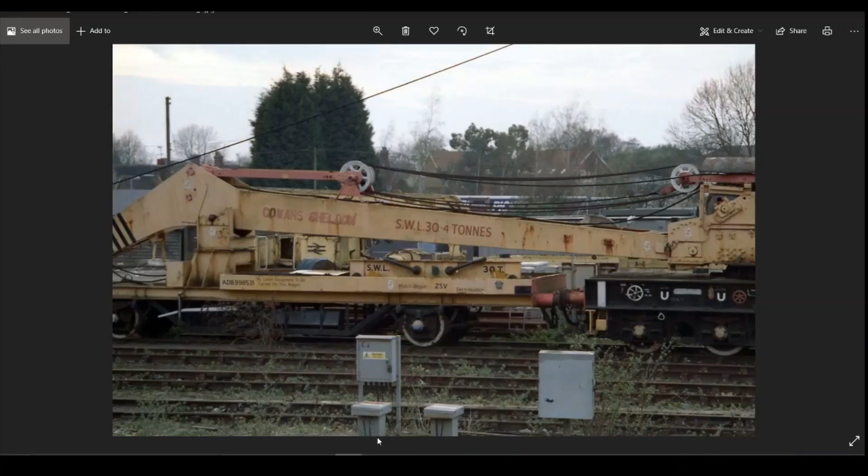What I'm thinking about working on and looking at today is sorting out the stretcher bar for the jib.

If you look at the bar, it's pretty much symmetrical. You've got two D shackles on top, both facing the same direction, and two D shackles on the bottom. I haven't got many pictures that show particularly well inside the hopper. I'm assuming they're probably laying outwards, not inwards, because if they hang towards the inside, the bottom of the shackle would sit underneath the I-beam, whereas if they hang diagonally outwards, the I-beam can sit flush on the floor with the shackles laying down onto the floor on the outside. So it's pretty much symmetrical.

So we're only going to draw half of it and then mirror it across. I'm going to create this as a new body as well, so that if we need to we can print it separately rather than having it print as one part of the underframe. But there's flexibility that if we want to do it as one part, we can just combine them later.

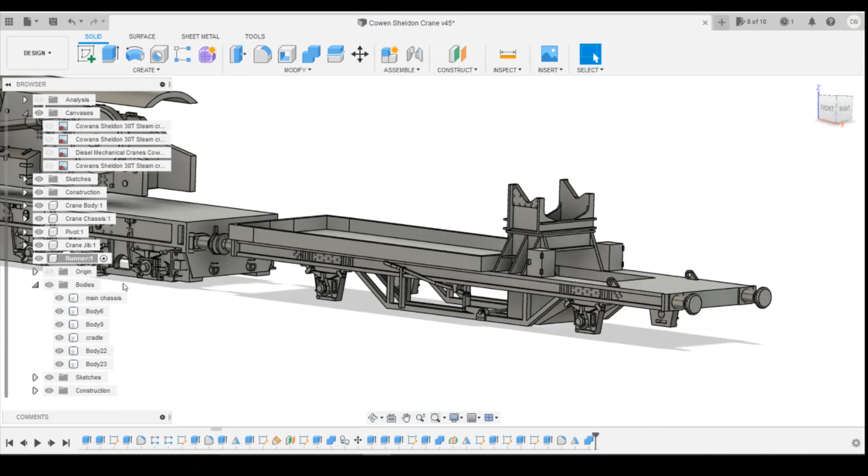Okay, so jumping into Fusion, we'll make sure that radio button is checked for the runner here, and let's have a look on the canvas to see if the I-beam's drawn on. It is.

Okay, so you can see its position. We're going to be drawing it flush to the floor, and symmetrical, using the middle point.

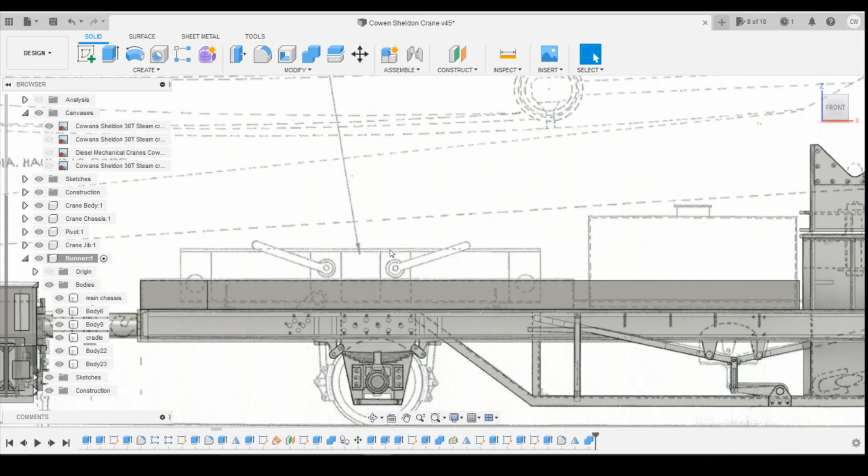If we create a sketch initially and turn the canvas off, that sketch is going to be on... are we going to do it on the bottom surface? Yes, I think I am. I'm going to draw it on that bottom surface initially.

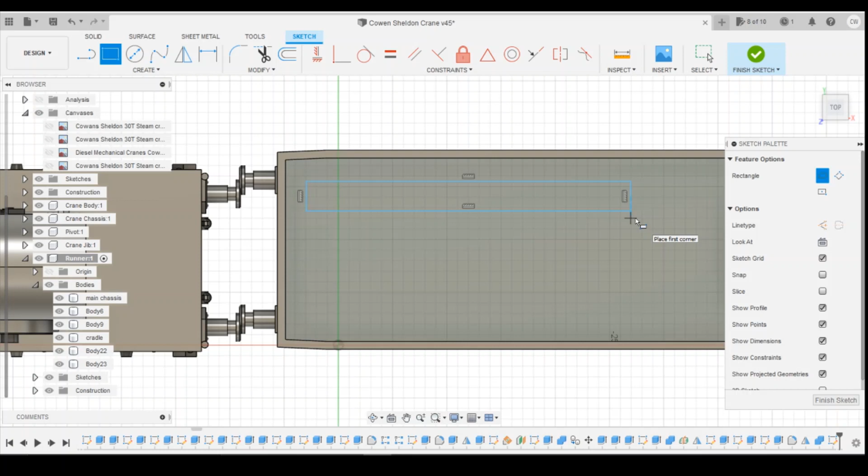I'm just going to draw a rectangle like that, and I'm going to extrude it. In fact, let's just define its position.

Why is this lagging a little bit? So let's call it 30 mil long, and the width will go 3 millimeters.

Position to the edge. Photos - that one's not the greatest. It's probably 1.5 foot or so in.

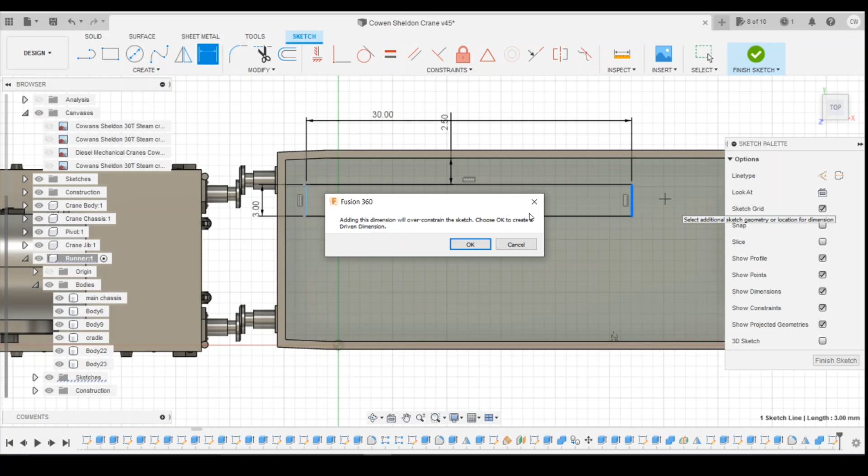So we'll go for 2.5, maybe change that. Width's already defined, and it's the distance from the end of the hopper. Let's just change that to 2 initially.

Okay, if we extrude this upwards, turn the canvas on, we can see whether we're in the right place. No, this end's fine.

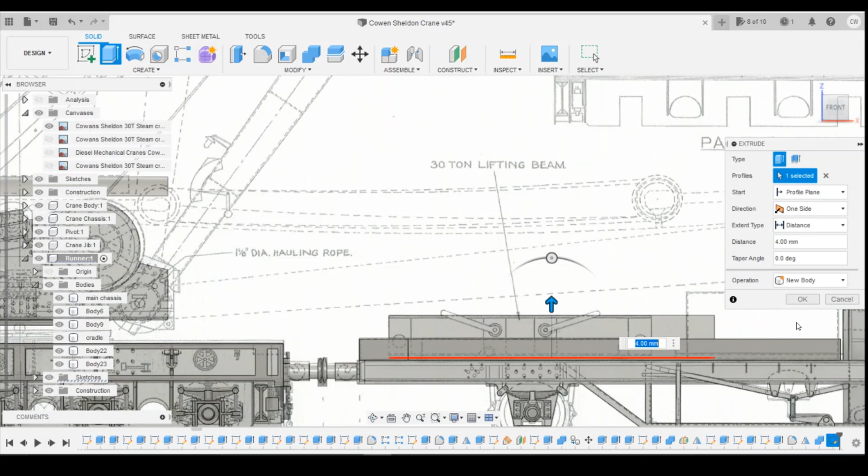Okay, so it's coming up by 4 millimeters, and it's as a new body. So we can see the length we've got. The length is massively wrong here.

So we can edit that sketch onto the bottom rather than top, and we can define this. Let's bring that down to 25 millimeters.

Still a little bit too long. Don't know why I keep going to the bottom, that's annoying. Let's go for 23.5 millimeters.

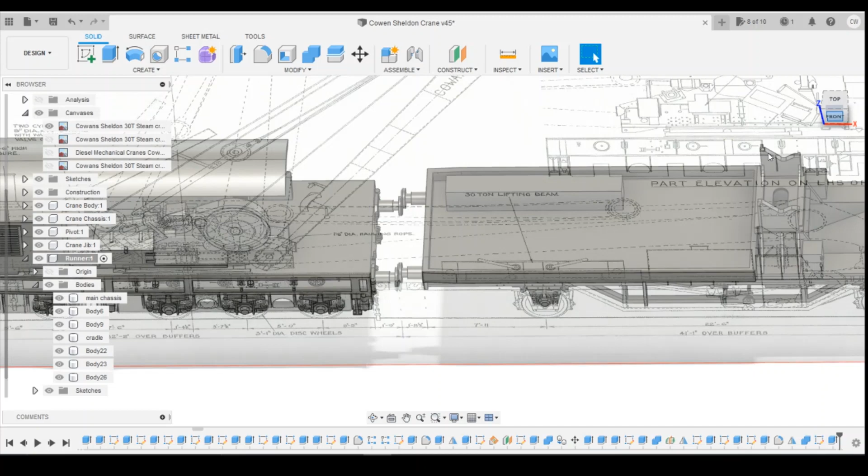Typical, we would probably be in the middle there. I'll just do it like this - 24 millimeters. Okay, so yeah, 24 millimeters is probably going to be about right.

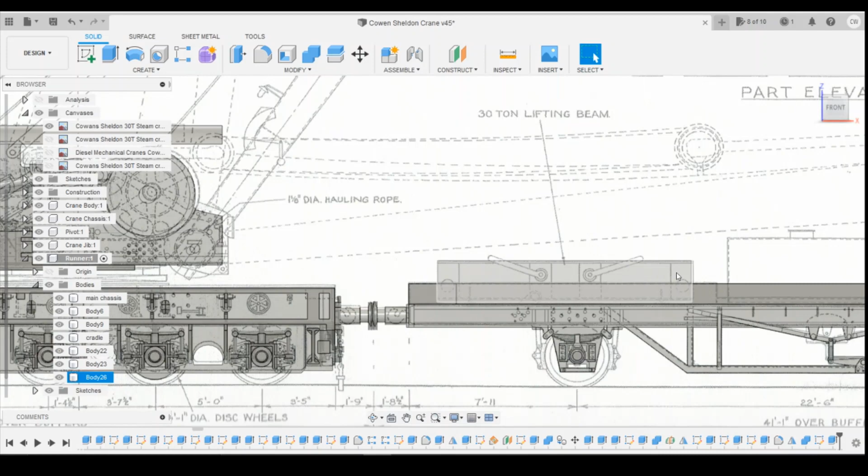Okay, let's have a look on the top surface and see if we've got a sketch from our canvases. Okay, so we can see position-wise where it's supposed to be, but bearing in mind we've made the wagon significantly wider than the sketch.

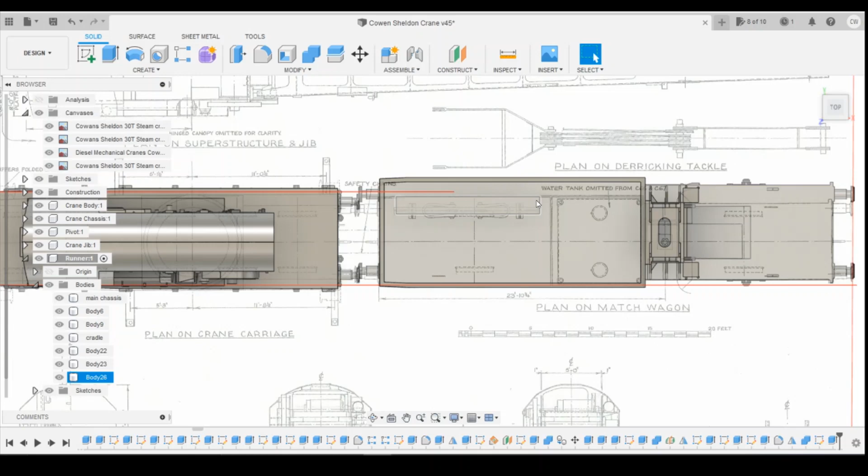Again, all about compromises. So position-wise, I think we're there or thereabouts. Maybe it needs to be a little bit narrower. Yeah, that probably only looks like it's maybe a foot wide.

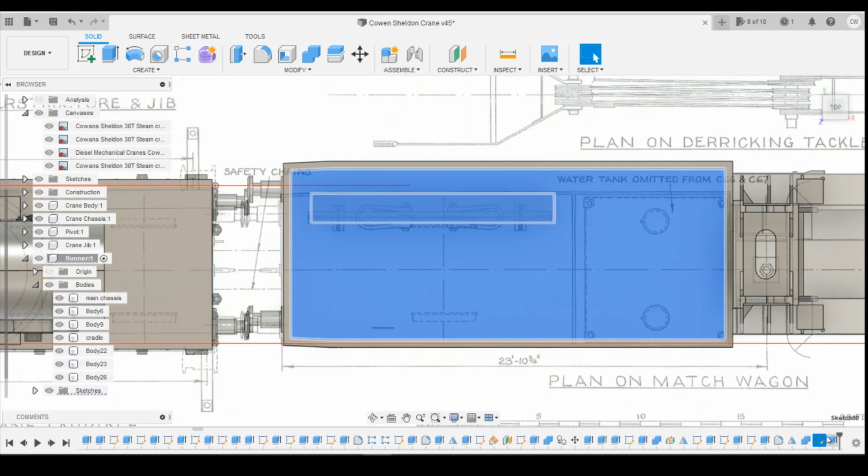So let's have a look at the sketch there. Define the width, that's 3. So let's bring that down to 2 millimeters.

Okay, and now if we bring this down to 12, that's going to give us our mirror point, and we can use the center point then to mirror across. Finish that sketch.

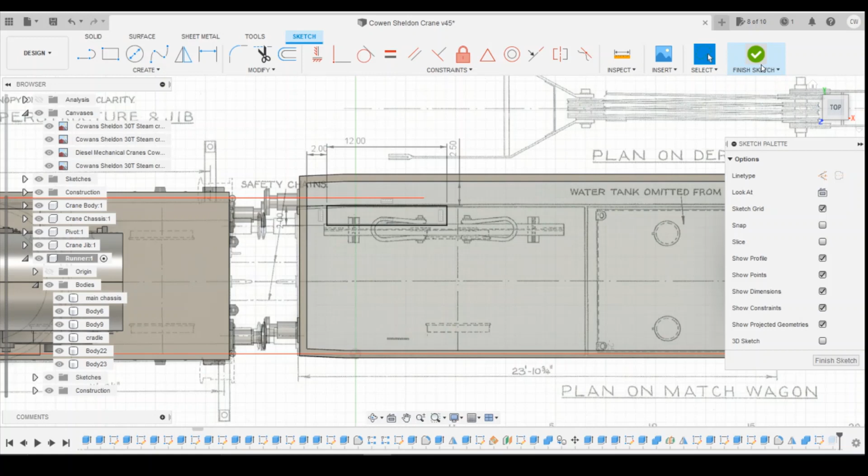Okay, so if we turn all the other bodies off, we'll get the canvases off as well. We're going to turn that into an I-beam now. So if we keep body 26 turned on, let's get rid of the main body chassis. We're going to look at it end-on and draw a sketch on the end here.

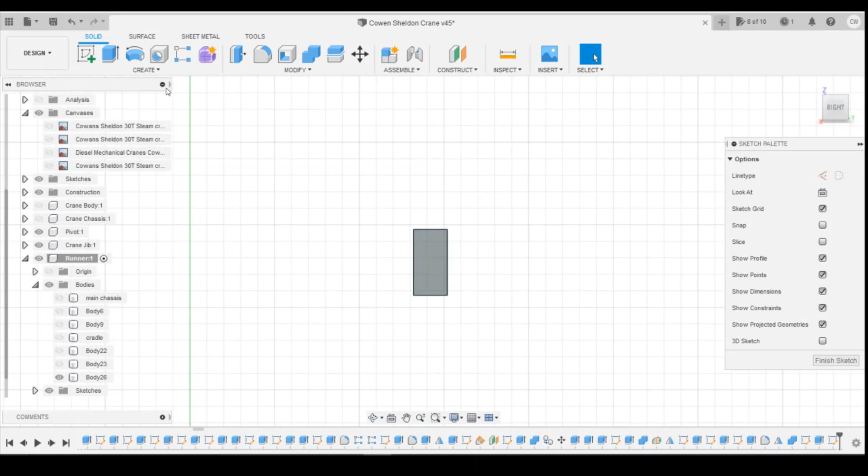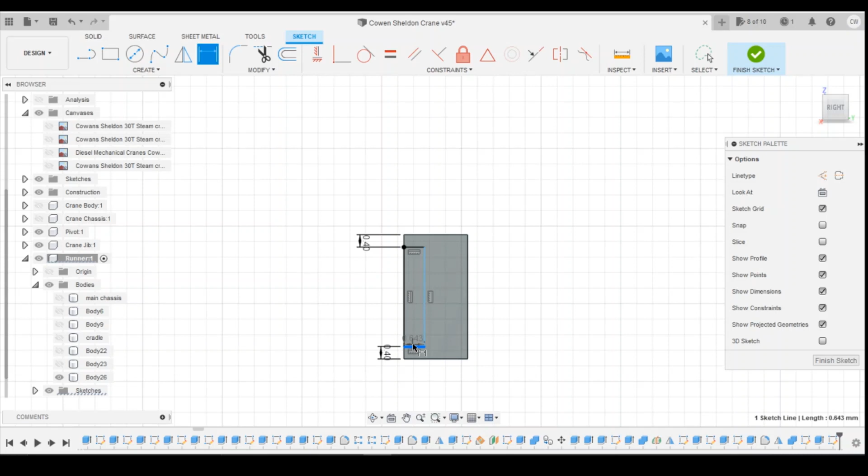Define the distance from the top down, I'm going to go as 0.4 millimeters. Define that as 2 mil. Let's define the width of the inset as 0.7, that leaves a 0.6 mil. Probably a bit too thin actually, I'm going to go 0.5 just to get a bit of meat down that centre piece.

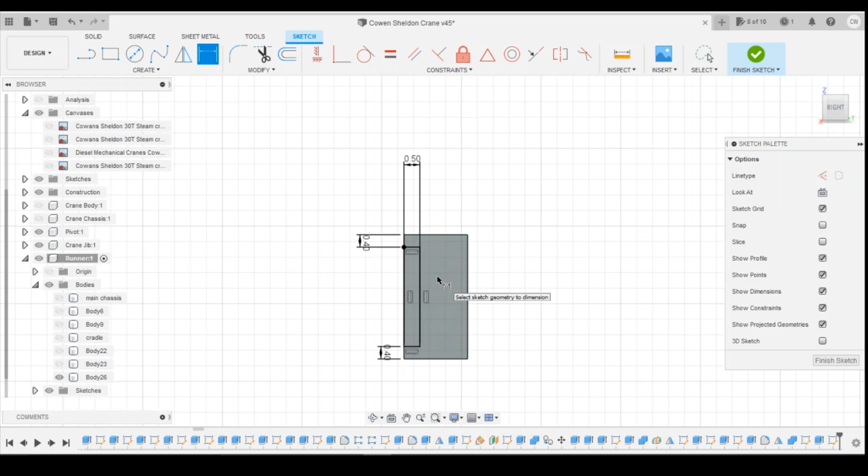Let's just draw another rectangle on the other side. If we just come across and snap to that point there, and then down to that point, define the width as 0.5.

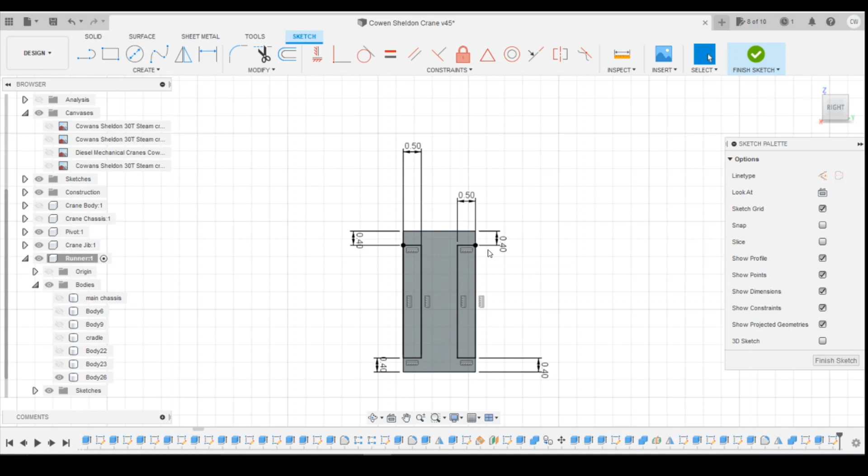Okay, so that's all now constrained. We can then select those two profiles and extrude them all the way through to this back surface. So we've now got our I-beam shape.

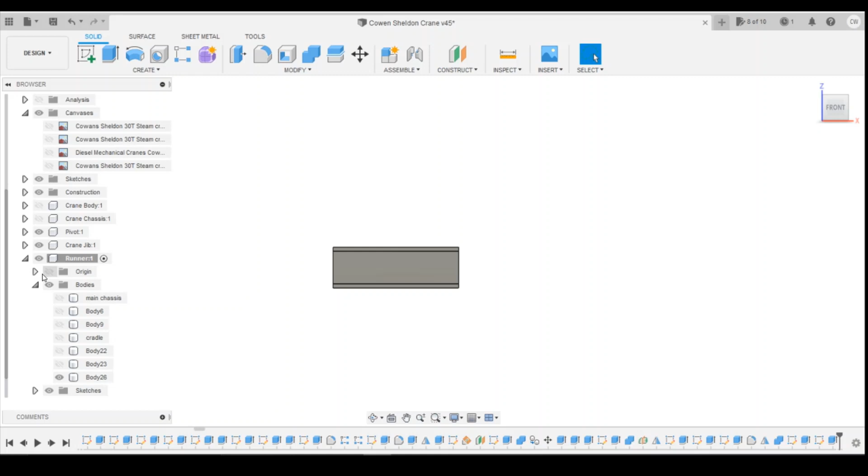Okay, so now we've got that, the next thing we need to do is start looking at the D shackle. If we turn on the canvas here, you can see, yeah, we've got this in the right point of the midplane. There's our D shackle sitting here. What's going to be the best way to draw this?

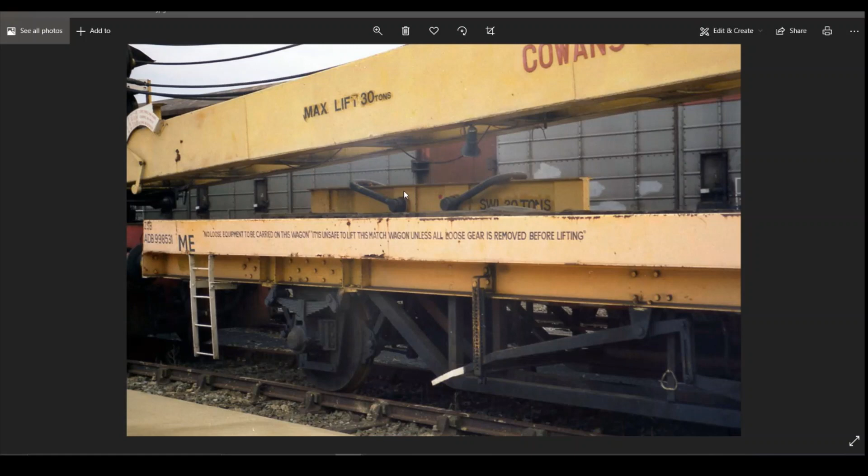So if we try and have a look at the pictures, I'm thinking maybe let's just draw some sort of circle that comes through. I'm trying to find a really good one, yeah, that's probably the best one. So we've got a few circles. Oh, actually, we've got these rectangles to draw here. So let's draw those, and then we'll come back to the D shackle.

So we've got these plates. If we turn the main chassis body off, yes, you can see them on the sketch as well. So draw on this inside surface, and they're just going to be rectangular shapes. That's snapping to the top of the I-beam there. Snaps that bottom corner to find the width. Let's go 2 millimeters just for ease.

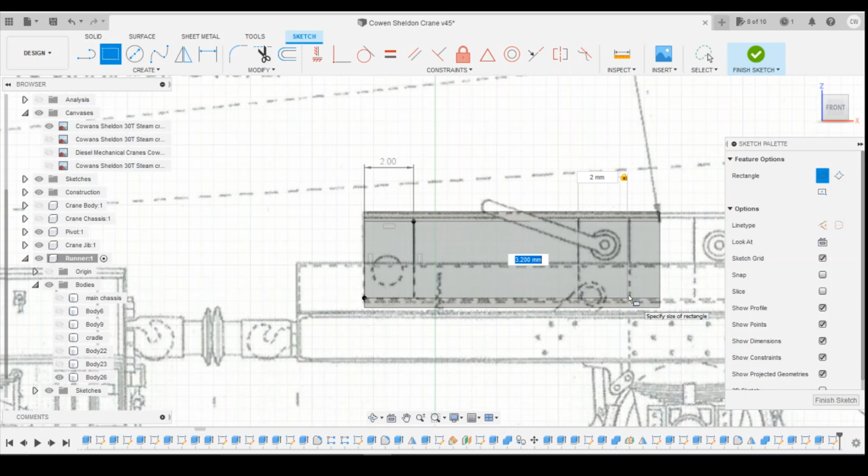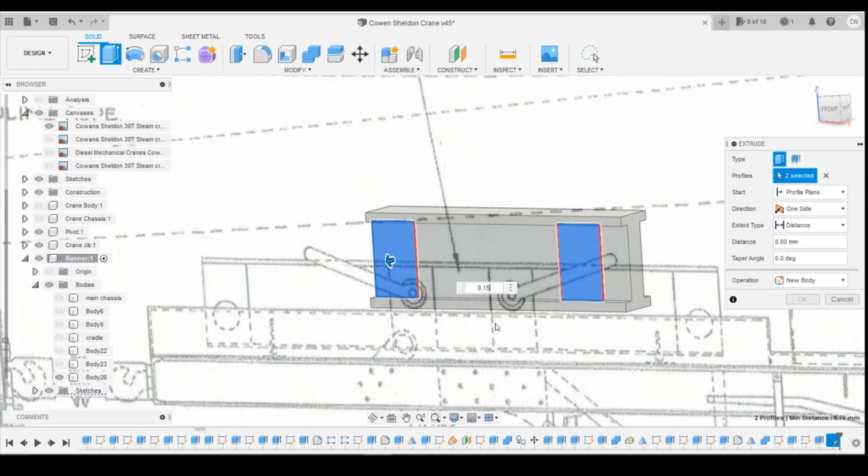That's all then defined. And if we draw one here as well, define the width is going to be 2 millimeters. Snap that in. Define the distance from the end, 1.3. That's all defined now, and then we can select those two and extrude them forward slightly. I'm not going to come particularly far forwards, maybe 0.15, I think, just to give it a bit of plate relief.

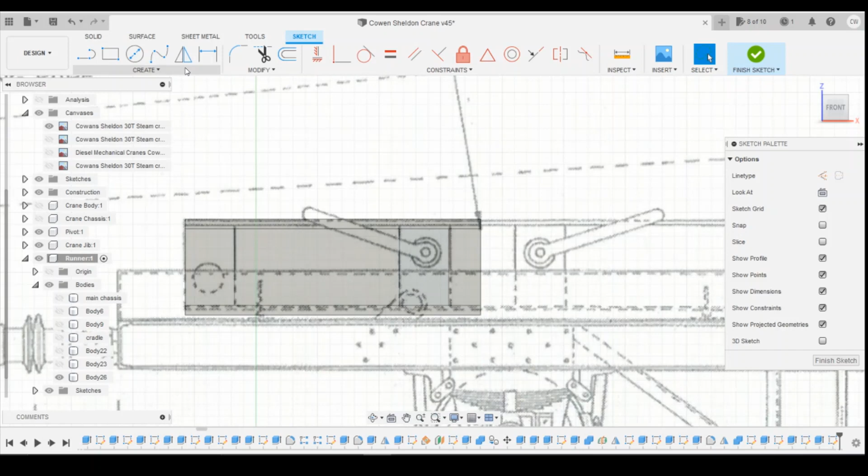Okay, so then let's look at the picture again. That's this one. We've got a few different size circles here. Okay, so let's create a sketch on that surface there. Lagging a little bit. Ever since this latest update they've done on Fusion, it's just been a little bit laggy on my laptop.

Let's find the midpoint. Is it going to be a midpoint? It looks like it probably should be. Yeah, it probably should be. Let's use the midpoint and drag outwards. Okay, I'm going to go 1.3 millimeters in that. I'm going to bring that forward to 0.15 millimeters.

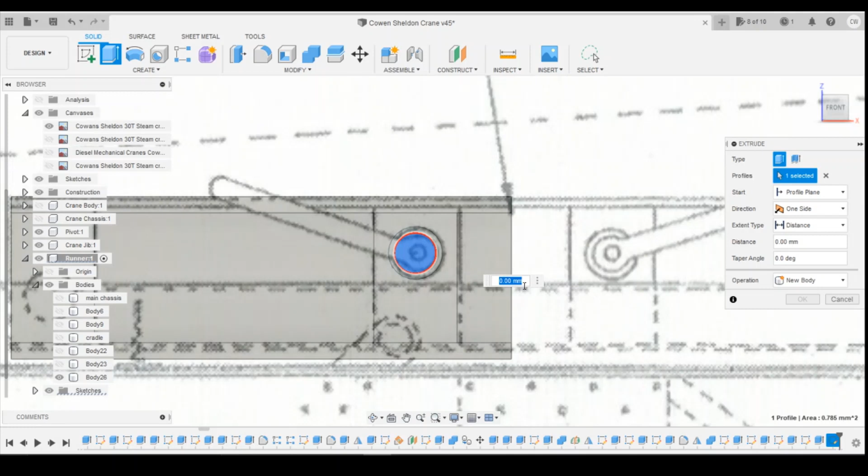And then I'm going to draw another circle off of there. That's going to be 1 millimeter, I think. Picture. I'm going to bring that forward 0.3 millimeters, and then there's another circle on top of that. And that's going to be 0.8 millimeters.

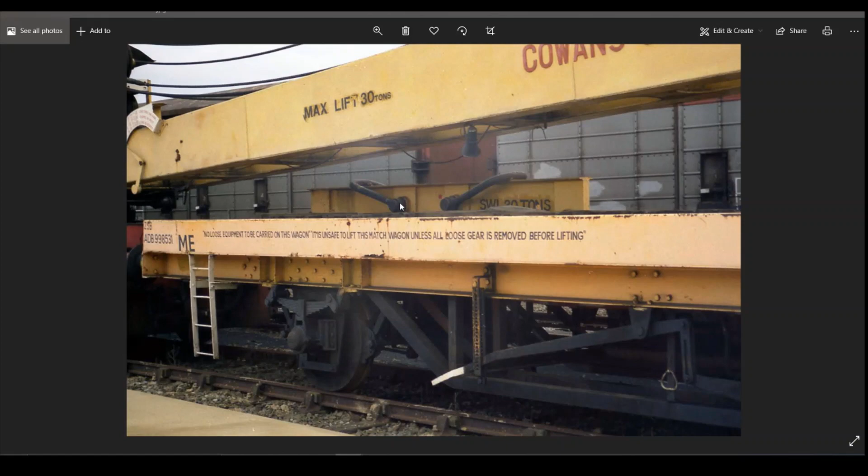So you can see we've got like the different steps coming down here. And I'm going to extrude this forwards as well. Let's go 0.3 millimeters now. What we need to make sure is that actually sits proud, which it doesn't. Because clearly the D shackle's got to come around. So that's probably going to space.

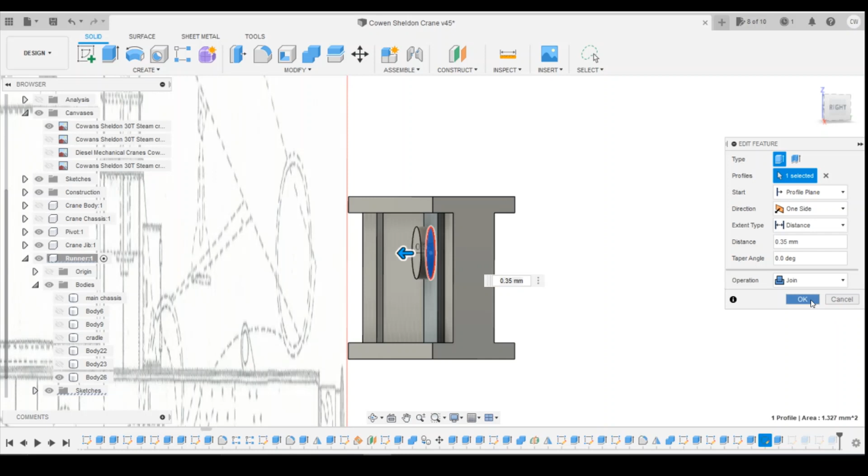I reckon this bit should be sitting proud. So this inner surface here needs to come forwards. If we extrude that, that's going to go to that face. So that this part then sits proud. I'm going to make that one wider, go for 0.35 on that. And that's going to be the width of our shackle coming around, I think.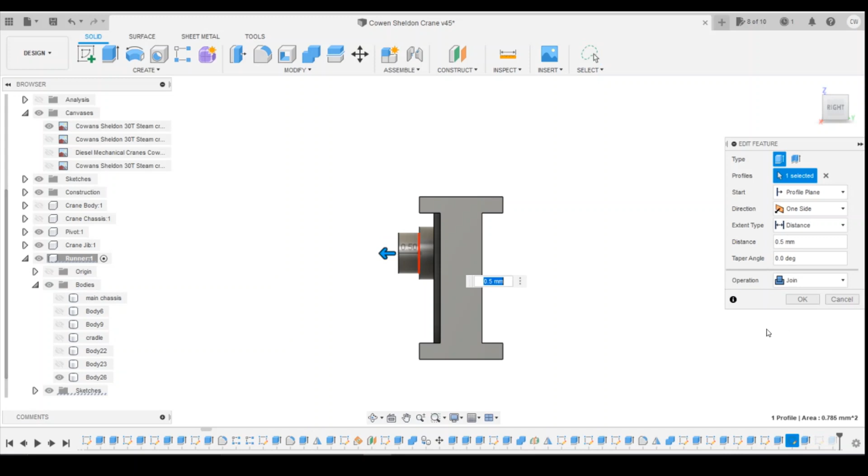I'm actually probably going to go wider than that because I'm thinking about printing it and how well it's going to come out. I'm going to go 0.8.

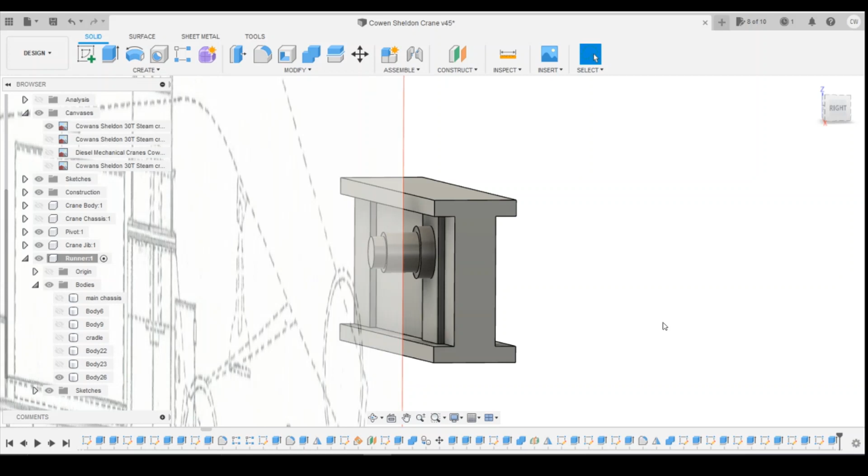Okay, so the next thing we need to do is mirror this lot over. Trying to think about the best way to do this. Might be actually to just split this in half and then mirror it all across. Yeah, I'm going to do that.

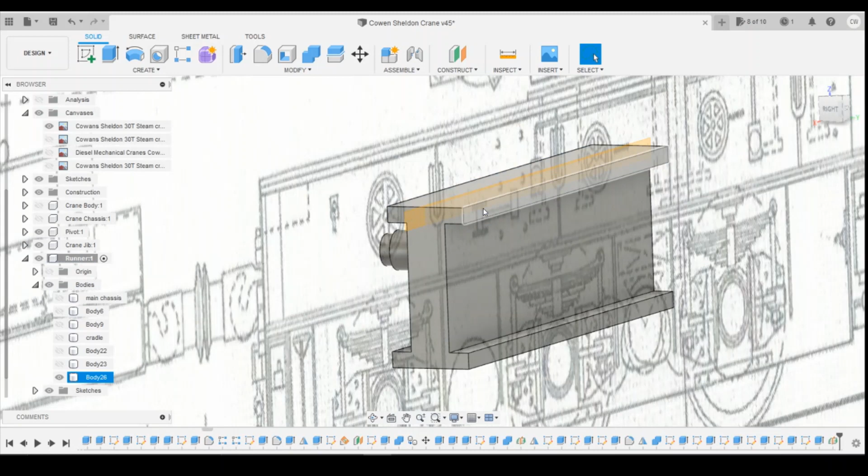Means I need to draw a... no, I don't. I'm going to create a mid plane between those top two faces, and then I should be able to mirror this across using the mirror tool.

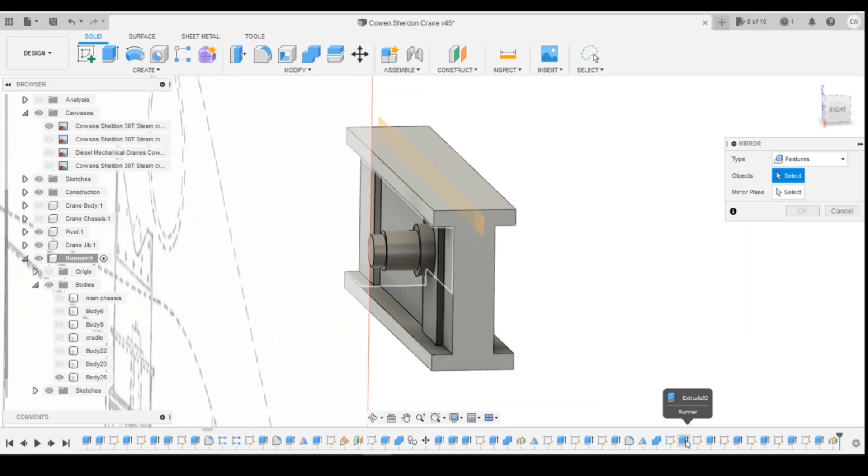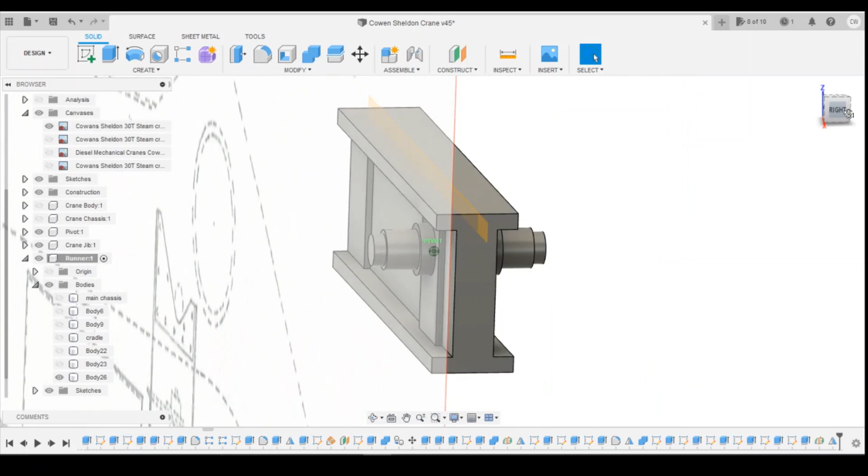And just select the features, so we're going to want to try and find that one, the two plates, and then all of the circles that we've just drawn there. The mirror plane's going to be that center point. Click on OK. Good. Okay, so we then need to draw the D shackle.

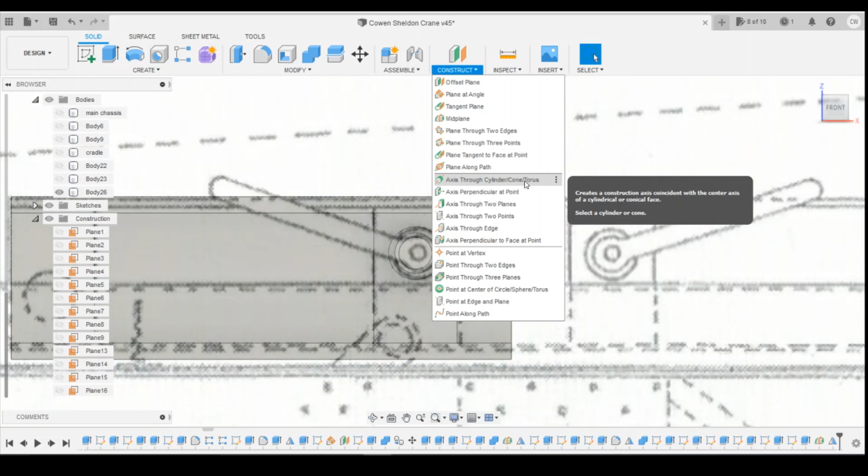Okay, so the next thing is to draw the shackle going round. I think what we're going to do there is not that one. We're going to construct an axis through the cylinder. Turn off this canvas so we can see it.

We use that, that's created an axis point, and I can do a plane at angle off that point like that. So you do a plane through an axis on the center of the spindle here, which creates that axis going through the middle, and then we can create a plane at an angle off of that.

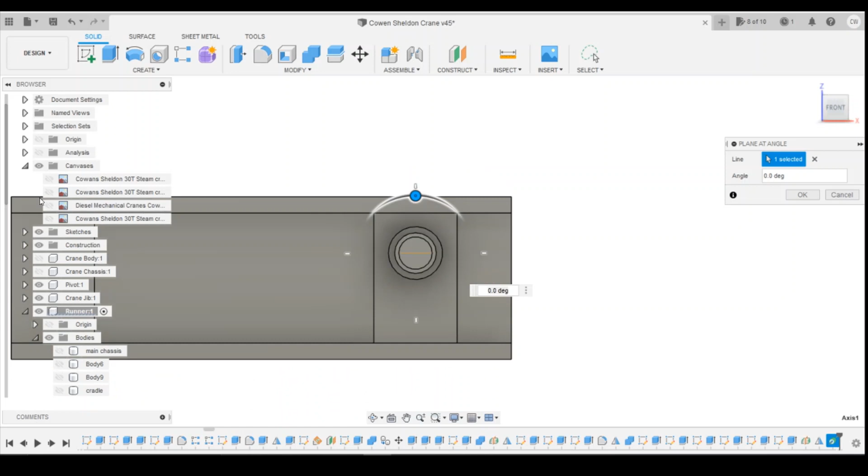So the next thing, if we have that canvas on, is we're going to rotate this round, so you can see the planes here matching the same angle. It looks about 20 degrees, so I'm probably going to go with that initially, and then we'll see how that looks and how it draws.

Okay, so we rotate to the top now, let's have a look at this. Yeah, you can see it bends there. Does it look like that? Yeah, it does.

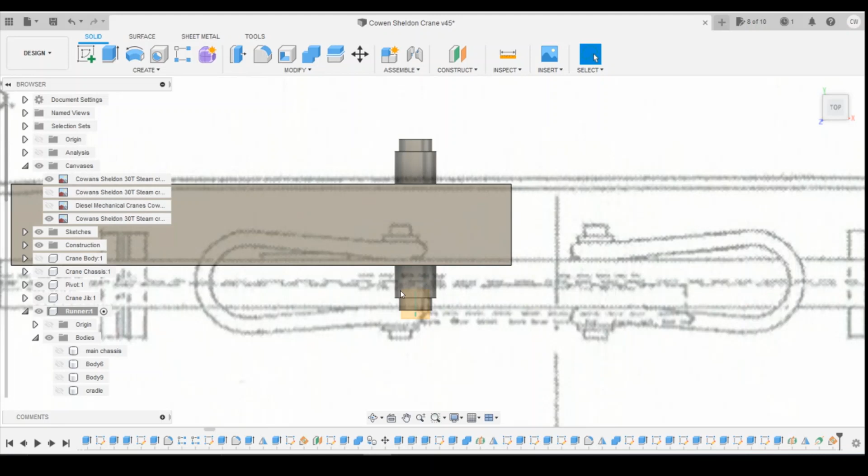Okay, so how are we going to draw that? If we create a drawing off of that plane at an angle we've just drawn, didn't want it to rotate there, not helpful.

Let's find the midpoint on here, if we can draw on that surface. Can't, it's a pain. Let's draw a line, see if it will find midpoints. Yeah, midpoint, that point. No, it's not. Can't constrain it. No, it won't either. Okay, I'm probably just going to have to draw this then.

So if we use spline points, I'm initially constraining it to the midpoint of this circle here. I'm going to come out straight slightly and put a little bit of curve outwards, and then start to curve this round like that.

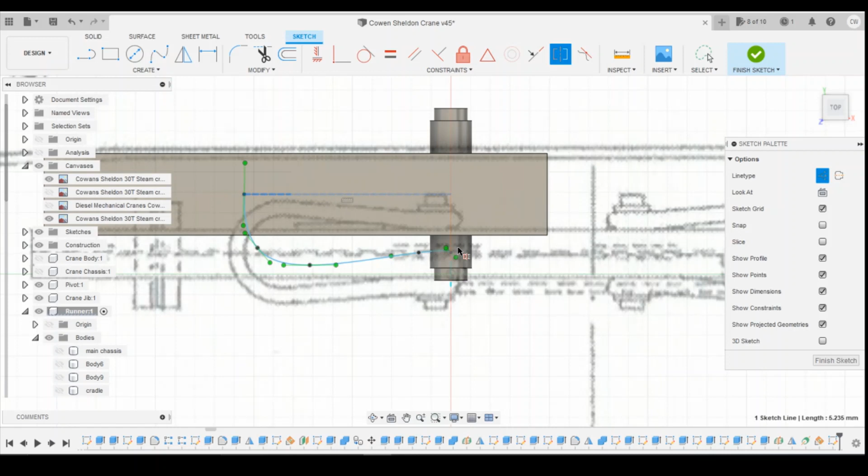If we do symmetry, so if we should be able to - no, symmetry is not going to work on there. We're going to mirror that sketch on that. So mirror that sketch across the mirror line using that one. Like that, yes, that's what we're after.

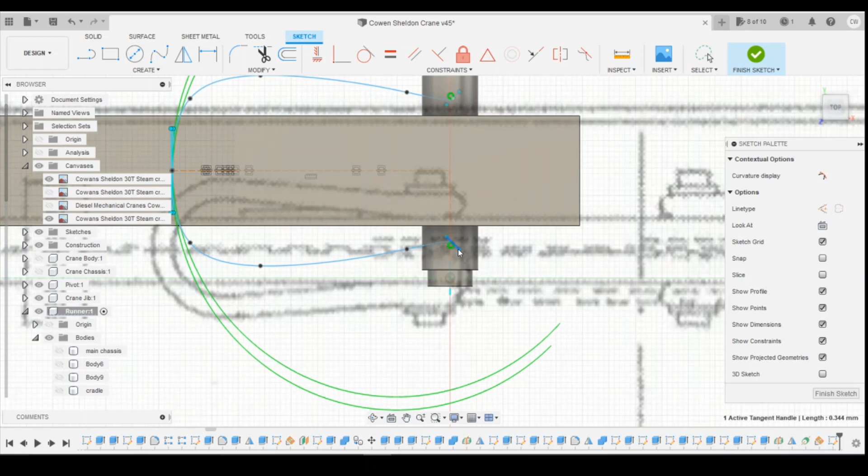Okay, so if we, this handle here - I didn't want to do that, undo that. I want to change that handle, stop moving like that. Let's undo the mirror to start with and see if we can change this handle to start. Yes, we've got to do that first.

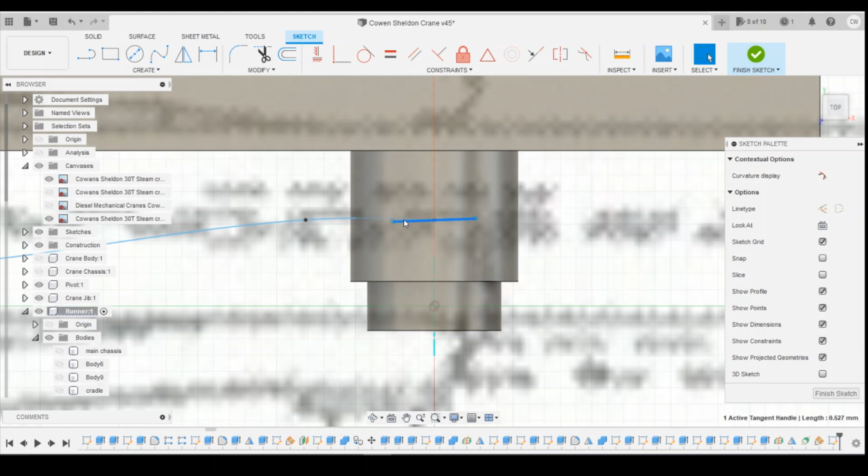So we do that, and what we want is that to be horizontal. So if we select the whole handle and then click horizontal, that'll snap that so it's straight. And then if we do the same on this handle here, make sure that's snapped straight there. That's it, and then we can mirror this all over.

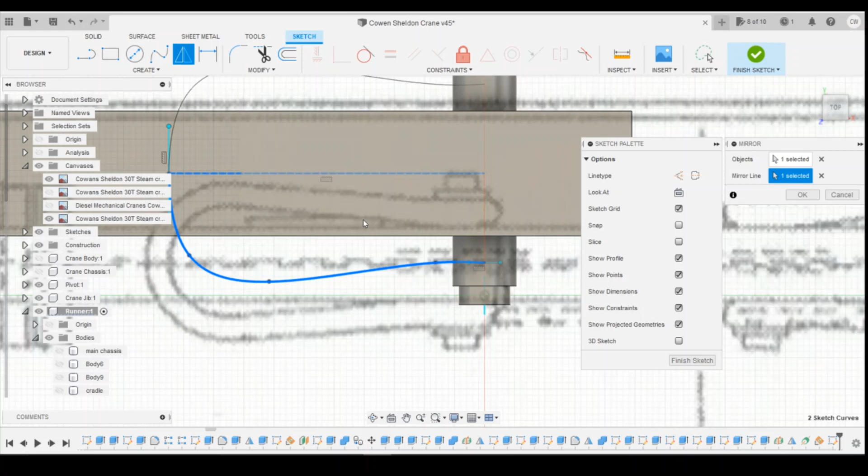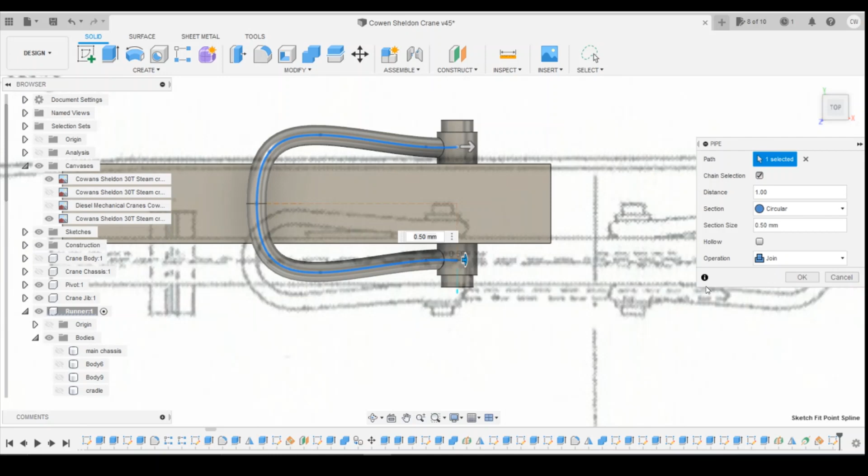And use that as the mirror line there. Okay, so we've got that shape, which is what we're after. If we now do a pipe across there, tell it to join, that's going to give us our shackle.

Let's see how that looks. So I'm going to bring that down a little bit on the angle, but I'm happy with the shape. I'm just going to increase the section size to 0.7, just so it's a little bit beefier. And I'm going to, as I say, change the angle here using our plane at an angle.

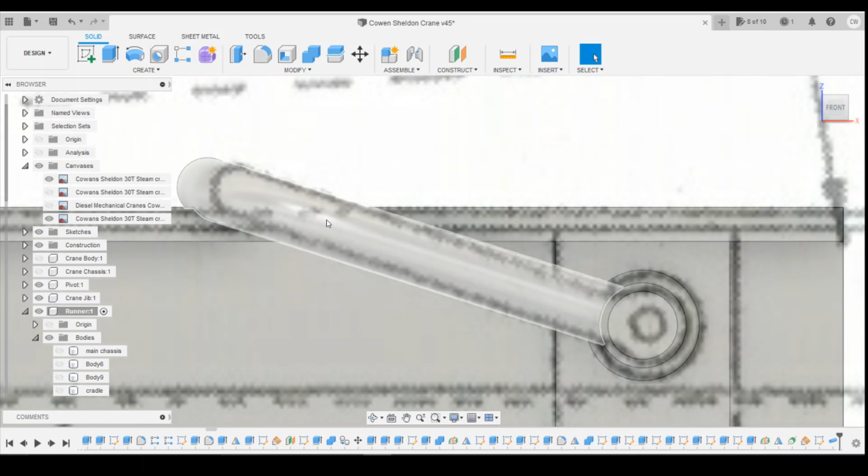I'm just going to edit that to bring it back a little bit straighter. So if we go minus 18 degrees, the reason I want that is I need it really to be touching here, so this is all supported and strong here. If it's floating up in the air, that's going to become very brittle. And obviously it's got to be touching in real life because it is laying on top there. Obviously it's not going to be touching that much.

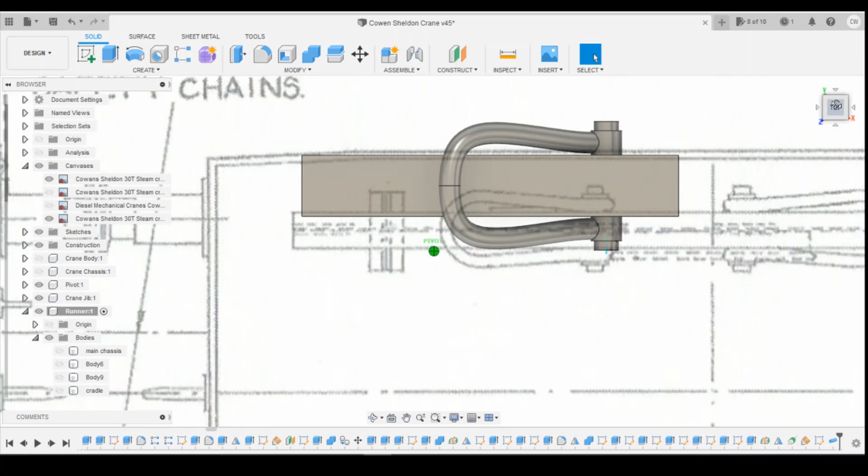So we've now got that shackle drawn there. I'm pretty happy with its shape actually. It's sort of, it's not perfect to match that, but it's a pretty good match, I think. Yeah, I'm really happy with that.

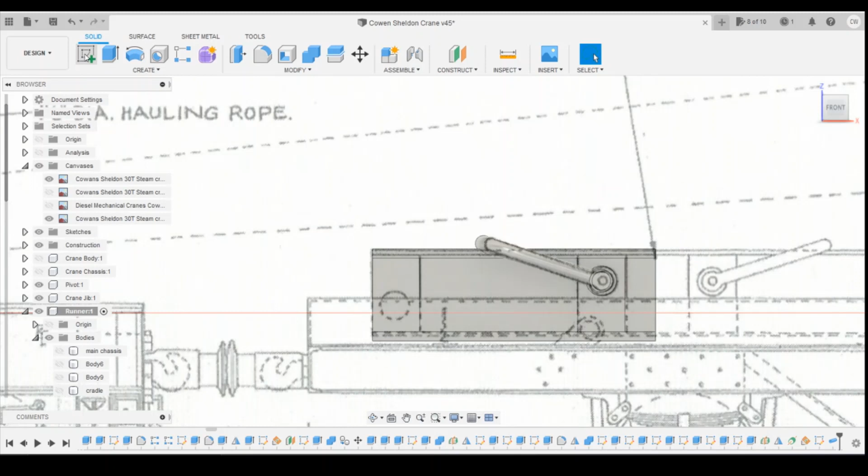Okay, so the next thing I'm going to do is draw the shackle on the other end. Now looking at the photos that I've got, I can't show you the photo that shows this clearly, but it is a much shorter shackle on this end. The photo I'm looking at has come off of the internet, so I can't show you it unfortunately.

So we're just going to create a sketch on here. We're going to use a similar design for these parts here. So if we use the midpoint, come up, and then 1.1 millimeters for the top one. Define its position.

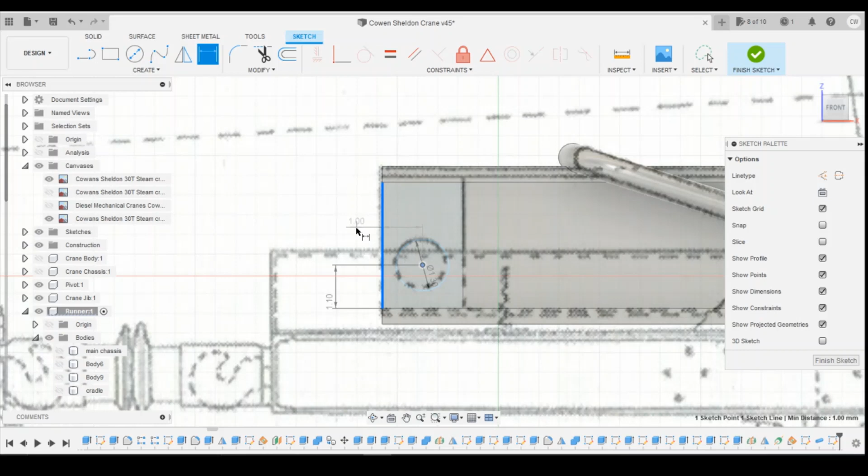Extrude this the same height as that one. Join.

Sketch on this front surface. The next one we did was 1 millimeter.

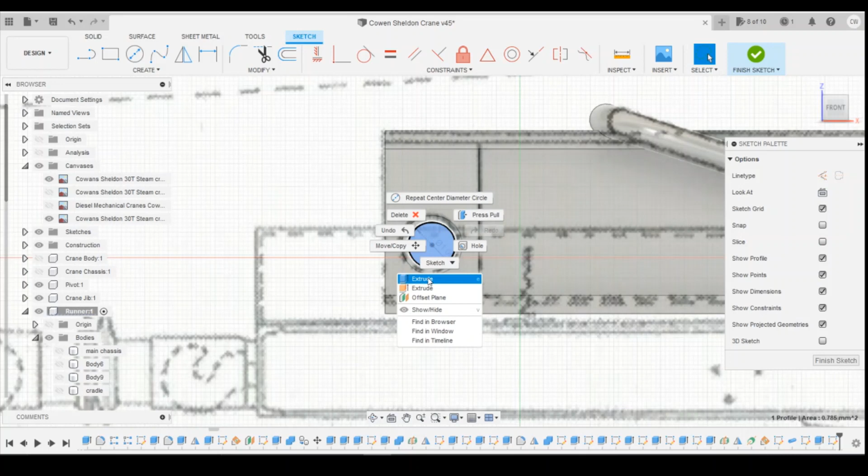Extrude that, and that was to that surface area. Join, and another one on top of it.

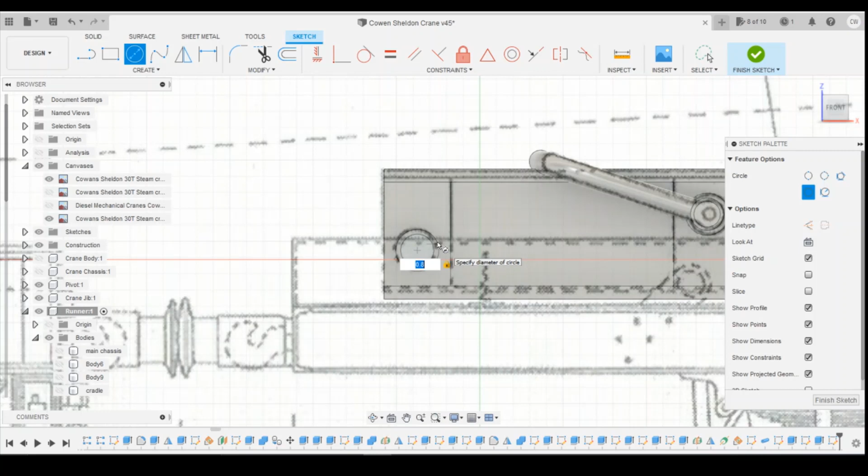I think that's 0.8, this one. Nope, that's not drawn out properly.

Extrude to that surface. Okay, and we move it across on plane 16. Minimize that.

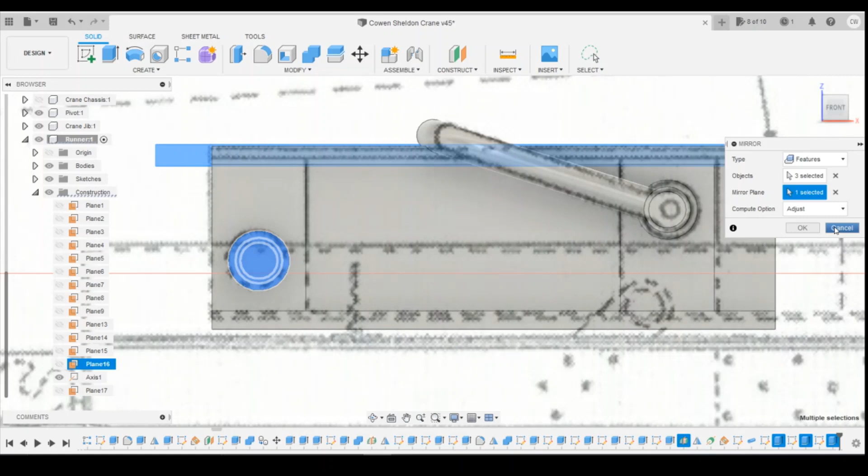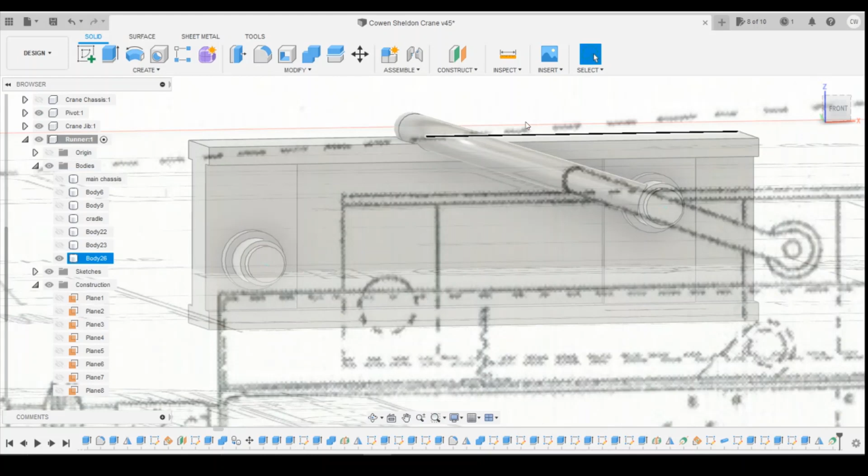Okay, so we use the same process for drawing the shackle. So we get the axis through the cylinder. Select the face, which is going to be that end one. Click on OK, and then plane at an angle to that axis.

Turn the canvas off so we can actually see. So there's our plane. It's going to come down.

As I say, it's much shorter on the photo. It's going to come down to about here. So we've got a 35-degree angle. Click on OK.

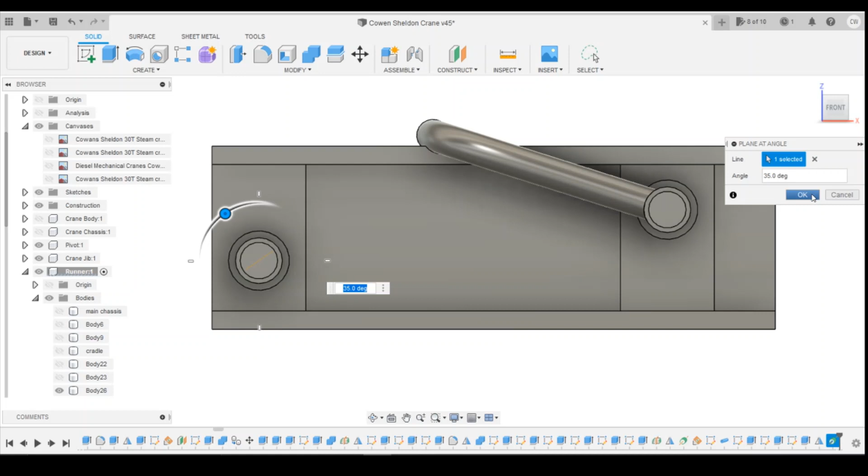Wait for that to compute, and then I can draw off that face. Look straight down. We're going to use a similar process.

Going to be using the spline points. Let's draw a line that comes across roughly where the middle is on here.

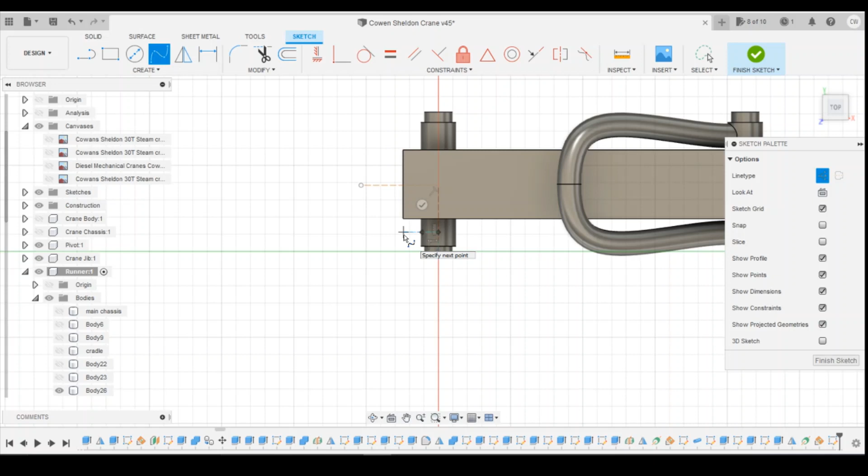That comes out. I'm going to turn those both into construction lines and use that spline point tool to make something that sort of looks and resembles a little bit like the shackle.

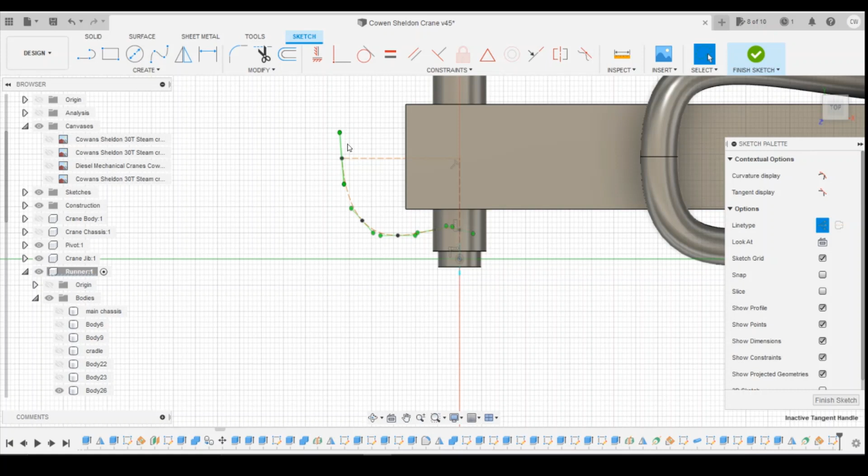Okay, and then if we select that handle here and tell that to be vertical, and then say move that handle, it wants to be horizontal.

These are drawn as construction lines. Let's turn that back off. That's it.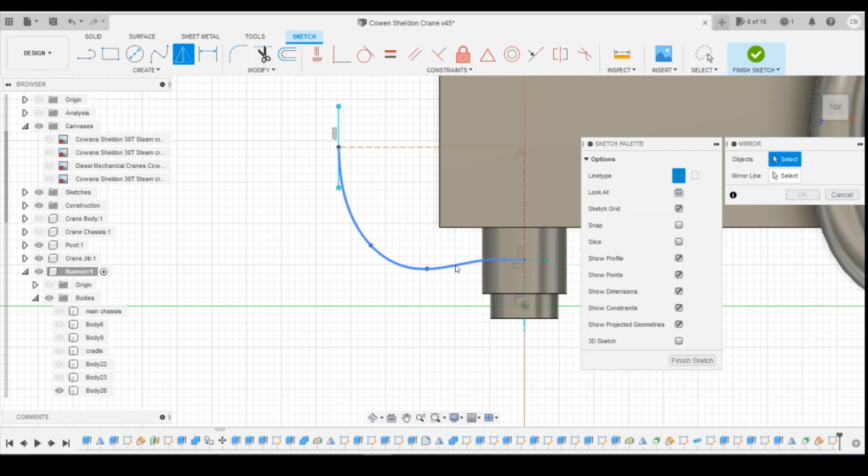Okay, and then we can mirror that across. So select that, mirror line being center point. Okay.

Finish the sketch and then pipe it, picking the two sides. This one I'm going to do slightly narrower, I think, because it will be touching the base.

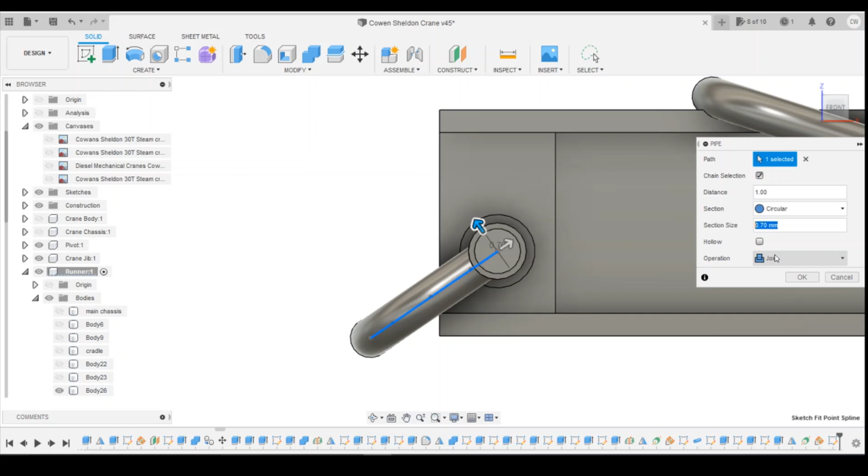I'm going to bring that down to 0.5. Okay, you can see that I'm going to want to shorten this up a little bit, so I'm going to do that by using the angle rather than changing the length of the pipe itself.

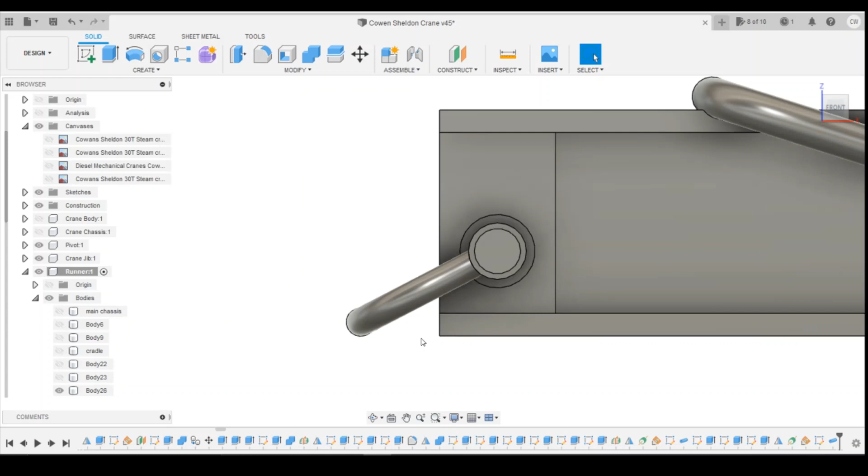Okay, so I've gone to 11.6 there. Just want to see if I get a line on here that I can see. See how it's just touching.

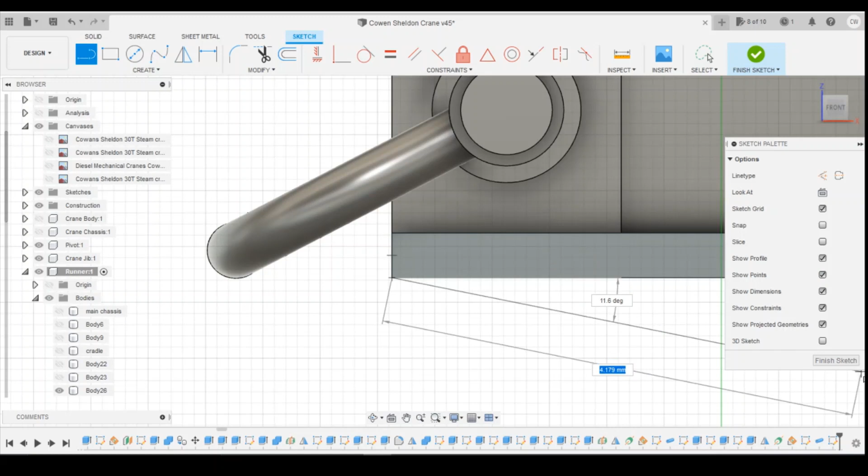Yeah, so with that just touching, I'm going to be happy that that will be okay. I can support it underneath when I print it. Yeah, happy with that. So let's finish that sketch and delete it because we don't need it.

Okay, so that's pretty much our I-beam done. I think we've just got to mirror it over. Let's turn these two planes off so we don't see them. That's it.

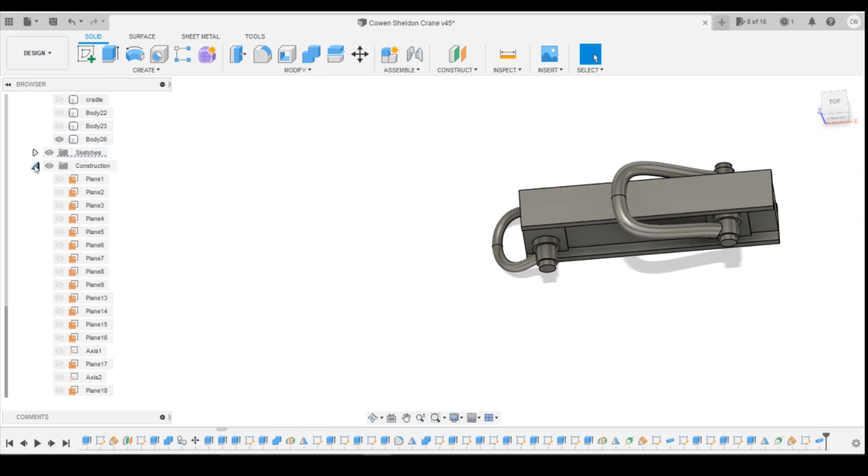Okay, so a quick look at the pictures. Is there anything else on here that we're missing? I don't think there is. I think that's pretty much done.

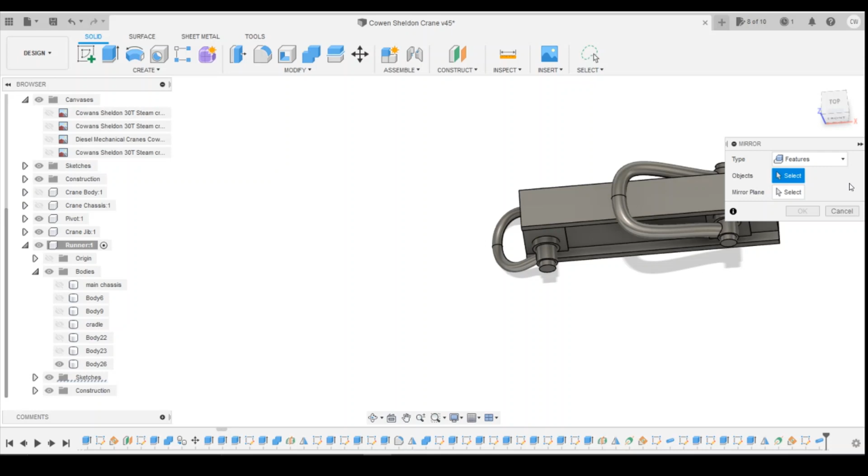So we're going to mirror this across now. So if we mirror the body, the mirror plane is going to be this inside face there. Click on OK.

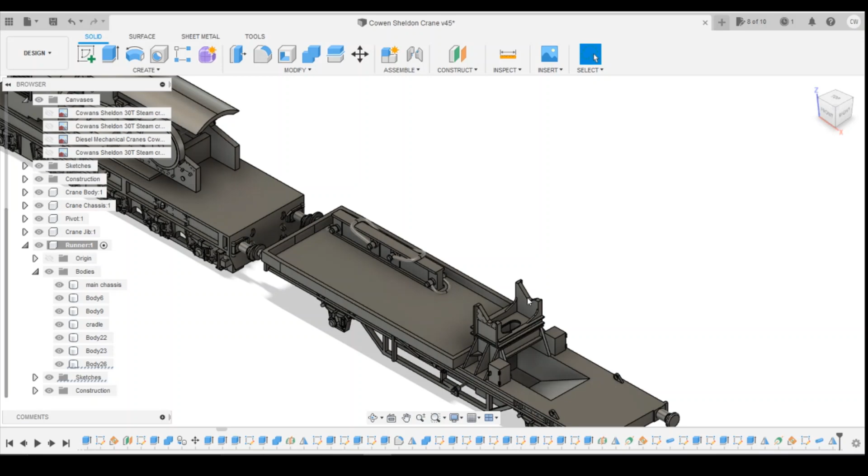And then what we'll do is we'll turn everything else back on so we can see what it looks like all together. Okay, so there's our I-beam sitting within the wagon.

I'm really happy with that. Have a look at the pictures. We'll see if we can compare the lengths.

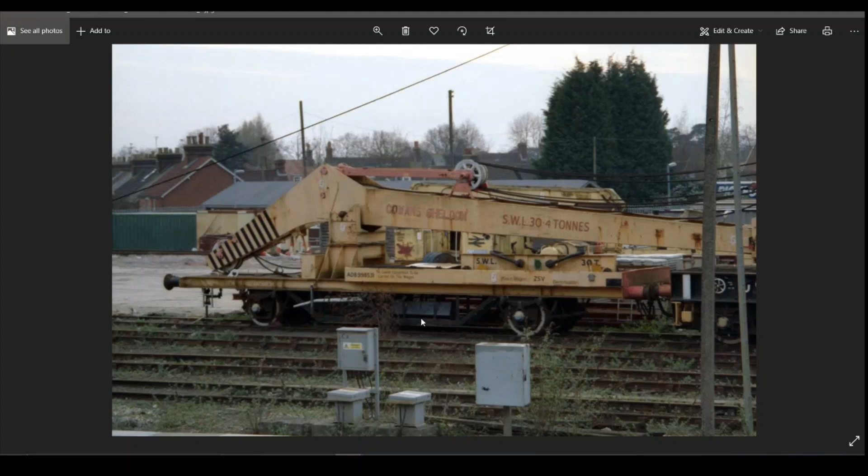So that looks like, yeah, it's sort of halfway between here maybe. Maybe a little bit short, but it depends on the angle you're looking at.

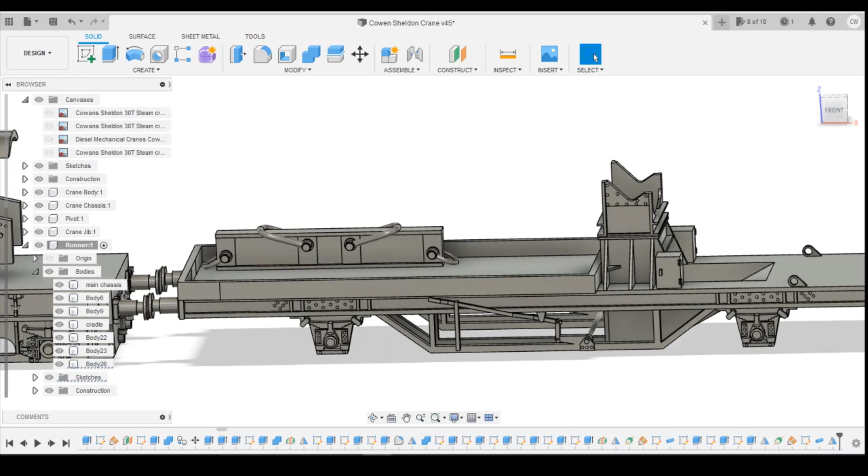Maybe the position of the whole thing needs to move out slightly, but because it's a separate body, you can just glue this in place wherever you feel best on your body. But I think length-wise, it looks pretty good. I'm pretty happy with it.

So I'm going to leave this lesson here today because that's taken probably 25 minutes or so to draw that up. So I'm going to finish the lesson off and then we'll come back on the next lesson and we'll fill the rest of the hopper in here.

I think realistically it's just the bits of sleepers they use for the jacking points, things like that. So we'll fill this all in here on the next lesson.